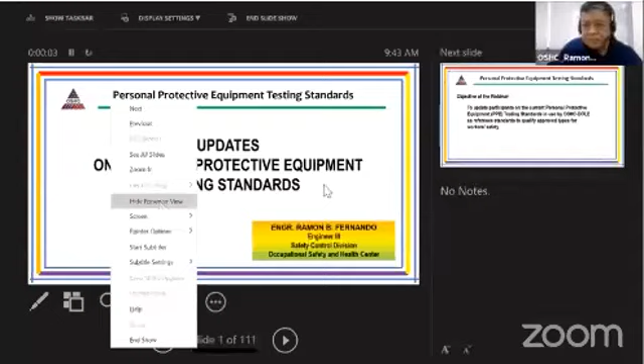Okay, can everybody hear me? So let's start with our webinar. My topic will be on updates on personal protective equipment testing standards. The objective is to update the participants on the current personal protective equipment testing standards in use by OSHC as reference standards to qualify approved types of PPE for worker safety.

You may be familiar with the prevailing laws that only approved types of PPE should be given to our workers for their safety in the work environment. But before we go to our topic, let us first examine what are the laws and regulations on workplace safety in relation to personal protective equipment.

As a reminder, the DOLE is the lead agency of the government in charge of the administration and enforcement of laws, policies, and programs on occupational safety and health. The legal basis is Presidential Decree number 442, or the Labor Code of the Philippines. When it comes to safety and health of our workers, including the use of personal protective equipment, our office, the DOLE, is in charge of the administration and enforcement of laws.

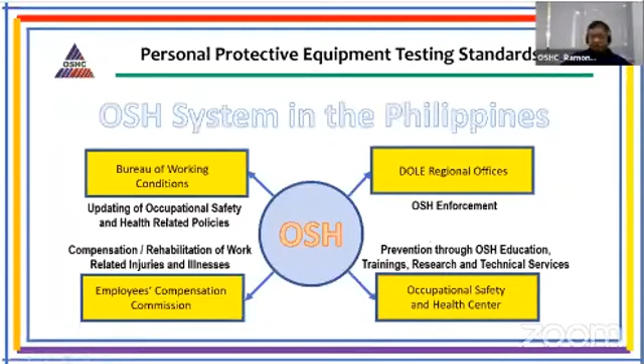So this is the agency that can give compensation or rehabilitation work. Now, for the prevention of injuries and illnesses in our work environment, through OSH education, trainings, research, and technical services, that's where our office comes in, the Occupational Safety and Health Center.

Just to give you a background, the Occupational Safety and Health Center was established through Executive Order number 307 by then President Corazon C. Aquino on November of 1987. And under Section 2, the center shall have one of its powers and functions: act as the duly recognized agency to undertake practical testing for safe use and set standard specifications of personal protective equipment and other safety devices.

So meaning to say, when it comes to personal protective equipment, our office, the Occupational Safety and Health Center, an attached agency of the DOLE, will be in charge when it comes to setting the standards for the use of our workers on the PPE that they will use.

Of course, the common reference of our agencies in DOLE when it comes to occupational safety and health will be our OSH standards, which is actually under amendment as of the moment. But by the definition given by Department Order number 198, it refers to a set of rules issued by DOLE which mandates the adoption and use of appropriate practices, means, methods, operations or processes, and working conditions reasonably necessary to ensure safe and healthful employment.

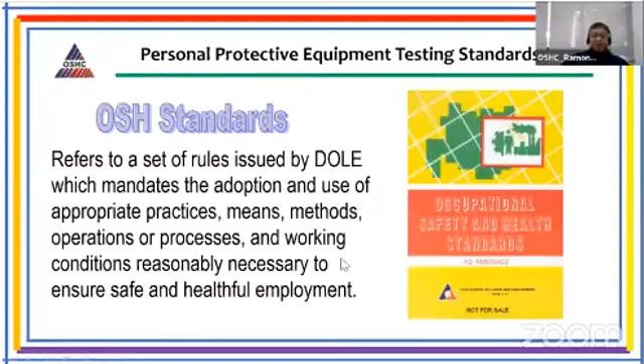So, under the OSH standards, Rule 1080, that's where we can see the requirements when it comes to personal protective equipment. Now, just recently, on August of 2018, to strengthen compliance with occupational safety and health standards and providing penalties for violations thereof, it was signed into law, the Republic Act 11058.

And for the declaration of policy, the state affirms labor as a primary social, economic force, that a safe and healthy workforce is an integral aspect of nation building. So as we can see here, Republic Act 11058 strengthens compliance to it. And there will be penalties, including for the use of substandard PPEs, if we are caught in the improper use of PPE in our workplaces.

Now, the implementing rules for Republic Act 11058 is the Department Order number 198, which was signed on December of 2018. Now, under Section 8, Chapter 3 of the Department Order Number 198, that's where we can see the workers' right to personal protective equipment.

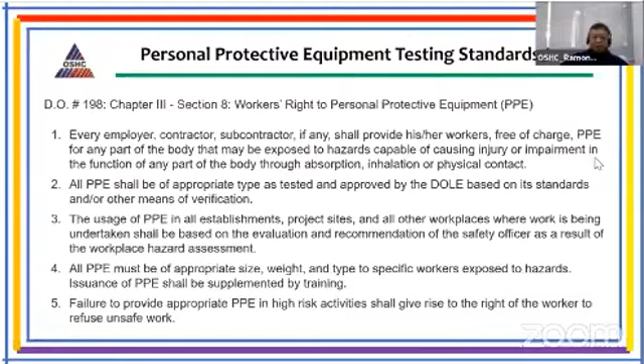So, there are 5 items. Maybe it's better to discuss them one by one. For item 1, every employer, contractor, subcontractor, if any, shall provide his/her workers free of charge PPE for any part of the body that may be exposed to hazards, capable of causing injury or impairment in the function of any part of the body through absorption, inhalation, or physical contact.

So it's very clear from this item that the employer should provide free of charge the PPE that each worker will need in order for him to be safe in the work that he does. And there is a PPE for every part of the body that may be exposed to hazards.

Now for item 2, it states that all PPE shall be of the appropriate type as tested and approved by the DOLE based on its standards and other means of verification. So here we can see that our requirement on appropriate type is strengthened. So when it comes to, let's say, a hard hat, maybe we provided a hard hat, but is it the appropriate type for the hazards that the workers are exposed to? Later on, we will examine what the appropriate types are.

And another thing, it should be tested and approved by the DOLE. So this is what we're looking at here. If for some reason we don't have testing on the types of PPE, the law says other means of verification. But again, if the DOLE or OSHC is capable of testing, then the approved type is the one tested here at OSHC DOLE. Okay, so that's what's in item 2.

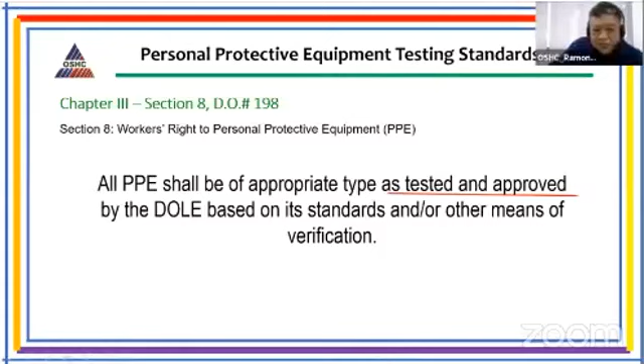Now, for item 3, who is responsible for the evaluation of the appropriate type? It states here that the usage of PPE in all establishments, project sites, and all other workplaces where work is being undertaken shall be based on the evaluation and recommendation of the safety officer as a result of the workplace hazard assessment. So continuously, the safety officer must conduct workplace hazard assessment, and based on the result of this assessment, he should recommend the appropriate PPE to be used by the workers who are being exposed to different hazards of the work area.

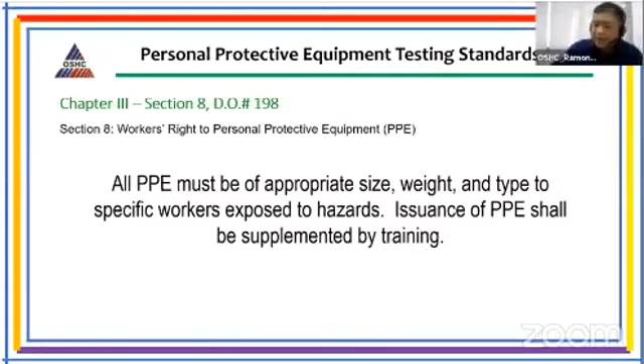Failure to provide appropriate PPE in high-risk activities shall give rise to the right of the worker to refuse unsafe work. Meaning to say, if the PPE provided is not appropriate for the work or for the exposure ng mga workers doon sa high-risk activities, then pwedeng sabihin natin ihinto muna yung trabaho until the appropriate types of PPEs are provided. So yan po yung mga karapatan ng ating mga workers when it comes to the use of personal protective equipment.

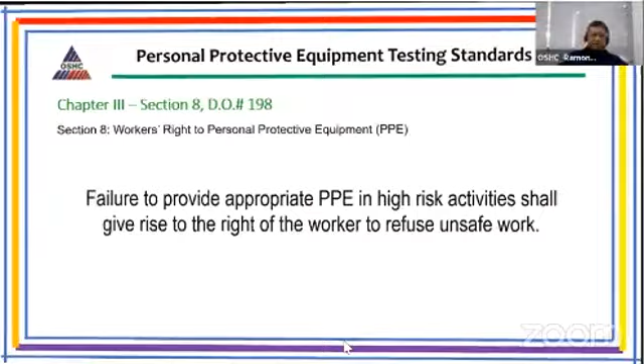Now, going back to our topic, let us first define personal protective equipment. Galing po ito sa DO 198. Personal protective equipment refers to specialized clothing or equipment designed to protect workers against safety and health hazards that may cause workplace injuries and illnesses. That is protection for the body, eyes, head, face, hands, feet, ears, etc. So for every part of the body that may be exposed to the hazards, meron po tayong mga clothing or devices that we use to serve as a barrier between the worker and the workplace hazards.

So by the use of PPE, it's only the last option sa hierarchy of controls, but still a very important option, kasi ang PPE, ang ina-avoid lang nito is the effect of the hazard doon sa worker. Well, the best option pa rin natin when it comes to the hierarchy of protection is actually to remove the hazard, to eliminate the hazard. And if we cannot do that, the next option will be to prevent the exposure of the worker to the hazard. And as a last resort, doon po pumapasok ang personal protective equipment in which we want to reduce the effect of the exposure of the worker to the hazard by wearing these personal barriers or devices para hindi siya maapektuhan ng ating mga hazards. So yan po yung ibig sabihin ng personal protective equipment.

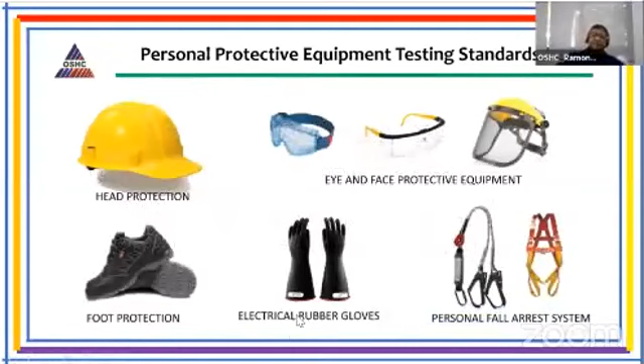So for today, I will be discussing testing standards in relation to these five parts of the body. We have the head protection, the hard hat, the eye and face protective equipment, nandyan po yung ating goggles, spectacles, and face shield. We have the foot protection, for the foot, electrical rubber gloves, and personal fall arrest system. So simulan na lang po natin siguro sa ulo, pababa tayo.

So for head protection, our present standard in use as reference is ANSI ISEA Z89.1 2014, or the American National Standard for Industrial Head Protection. So if we decipher yung title, ANSI means American National Standard Institute, ISEA is International Safety Equipment Association, Z89.1 is the code ng ANSI for the test method and minimum performance requirement for head protection. And 2014 is the version of Z89.1, which is actually the latest version for head protection in use or released by ANSI. Okay, so ano po ba itong Z89.1 na to?

This standard provides performance and testing requirements for industrial helmets commonly known as hard hats. It establishes the types and classes of protective helmets depending on the type of hazard encountered. It includes a specification for helmets designed to offer protection from lateral impact or top-only impact, giving employers and users the flexibility to specify the helmet that best meets the needs of their specific workplace. So ganyan po natin nakikita kung ano yung nilalaman nitong ANSI ISEA Z89 2014.

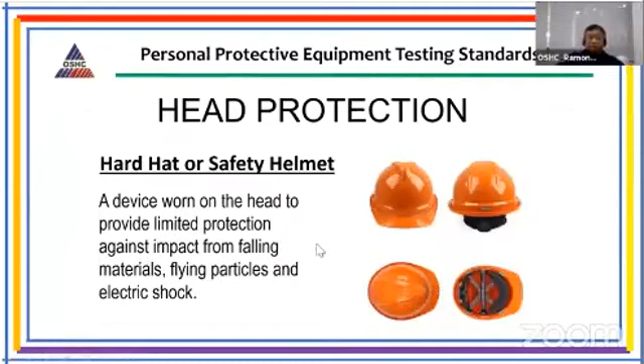So, what is a hard hat? A hard hat is a device worn on the head to provide limited protection against impact from falling materials, flying particles, and electric shock. So, meaning to say, anything that can injure our head, we rely on the hard hat to protect us doon sa mga hazards na yan. Okay, ano po ba yung mga hazards na talagang pwedeng magkaroon ng effect para sa ating mga ulo?

So here's the impact from falling objects. Like this worker walking here, suddenly there may be material that could fall on him. Of course, this will result in an injury, if not death. Bump against rigid stationary objects, penetration by sharp objects that could pierce our heads. Contact with live electrical conductors and fire hazards.

Now, what are the effects? For impact, bump, and penetration, it can be perforation or fracture of the skull. If you look closely at the X-ray of this person, we can see that the skull was really injured here. How about contact with live electrical conductors? It can be electric shock or even death, electrocution. And for fire hazards, it can be burns.

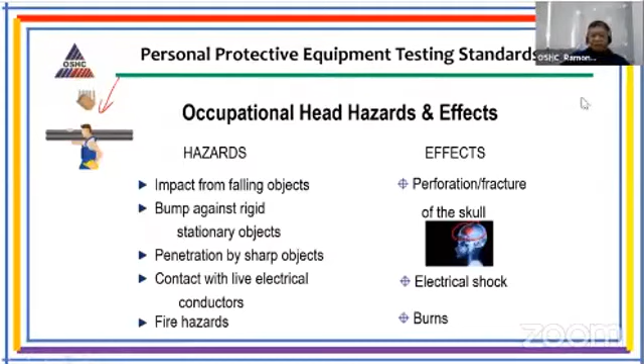So after identifying these hazards and understanding the effects, I'm very sure that we will need head protection. So let us examine what a hard hat is. First, there is the shell, the hard outermost surface of the helmet, excluding its harness, accessories, and fittings.

If we look at this, this colored yellow part is what we call the shell. And for this one I'm holding, it's colored white. This is what I use as my protection whenever I go to work areas. It depends—actually there's no regulation when it comes to the color, but it is management prerogative what color to use.

Let me give you an example. I used to work in a power plant, at Sucat Thermal Power Plant, for 17 years. Since the plant was big, the management wanted to easily identify the workers in the work area. That's why each department was given a different hard hat. Us in the office of the manager, we had white. Those in electrical, red. Let's say those in mechanical, they had yellow. General services, green. So it's a management prerogative when it comes to the color.

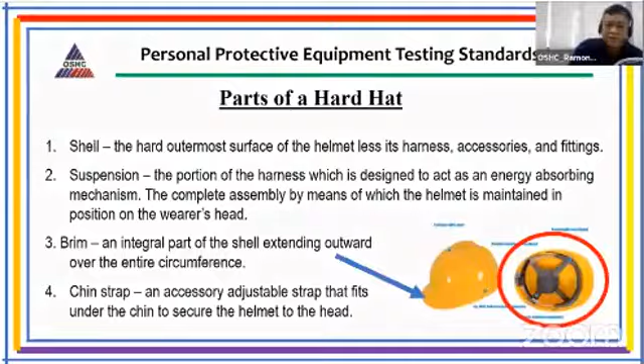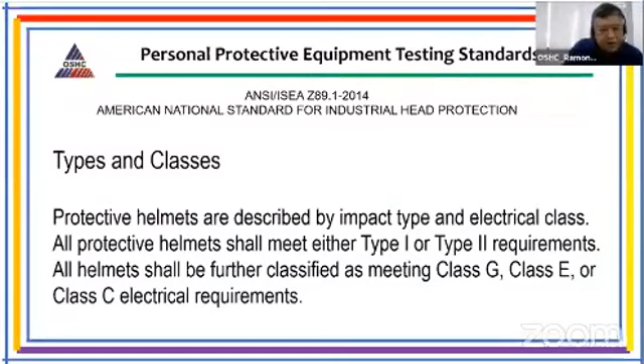Now, according to ANSI Z89.1 2014, protective helmets are described by impact types and electrical class. All protective helmets shall meet either type 1 or type 2 requirements for impact type, and all helmets shall be further classified as Class G, Class E, or Class C electrical requirements. Okay, let us qualify what is a type 1 and type 2.

Ang type 1 po, helmets are intended to reduce the force of impact resulting from a blow only to the top of the head. Kung may bumagsak na material or object doon sa top of the shell, siya po yung dapat na mag-absorb nung impact na yan. Yan po yung type 1 na tinatawag, only to the top of the head. In contrast to type 2, in which the helmet is tested doon sa top and also to the side.

Tinetesting po yan, but unfortunately, medyo mahirap po talaga maghanap ng type 2 dito sa Pilipinas. 95% sabihin na natin, or 98%, are only type 1. Why? Kasi nakikita ko rin naman na most of the hazards talaga ay actually sa taas ang nakikita natin. Why we wear a hard hat is because falling materials, siyempre galing yan sa taas. Kaya most of the time, yan po ang nakikita natin na availability doon sa ating market.

Now, bakit mandatory ang chin strap para sa type 2? Again, kung titignan po natin sa gilid ang protection nito, so most likely, baka matanggal o kaya bumagsak man yung tao, siyempre sa gilid din ito, siyempre dapat hindi matatanggal yung helmet.

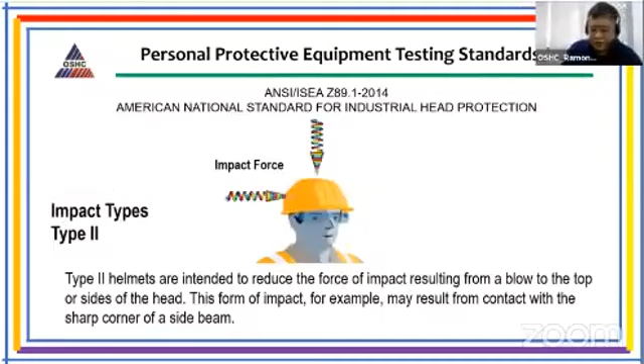Now, for the electrical types, both for type 1 and type 2, it must pass either a class E or class G. Otherwise, it will be classified as a class C. So what is class E or the electrical resistant helmet?

Class E helmets are intended to reduce the danger of contact with higher voltage conductors. Test samples shall pass the proof test voltage of 20,000 volts, and will burn through at 30,000 volts.

Class G, on the other hand, is a general utility hard hat intended to reduce the danger of contact with lower voltage conductors. Test samples shall pass the proof test voltage of 2,200 volts. But take note that this voltage is not an indication of the voltage at which the helmet protects the wearer.

So what does that mean? The 20,000 and 2,200 volts are just proof test voltages, not the rated voltage the helmet can actually withstand. What's important to know is that Class E has higher electrical resistance compared to Class G. Now what about Class C? These are the hard hats with no electrical protection.

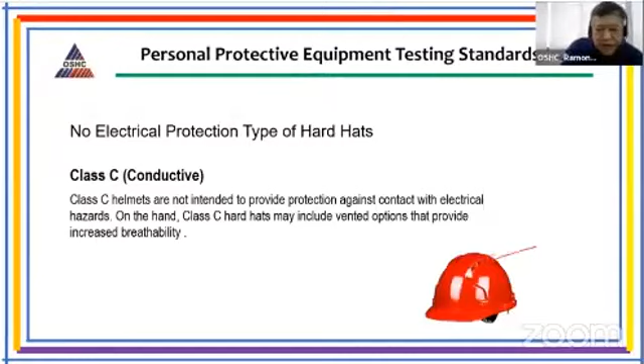So that's how we specify a hard hat, based on the impact type and electrical hazards that may be present in the work area.

Now, what tests do we need to qualify our safety helmets? ANSI Z89.1 requires four performance tests that must be met in order to assign a safety helmet type and class: force transmission test, apex penetration test, flammability test, and electrical insulation test.

So what is a force transmission test? It is a measure of the force transmitted to the test head form via an electronic load cell. A semi-spherical striking face impactor shall be dropped on top of the shell of the hard hat — later we'll drop this half-sphere striking face impactor onto the helmet.

Protective helmets shall not transmit a force to the test head form that exceeds 4,450 newtons, or 4.45 kilonewtons. Additionally, for each preconditioned specified helmet, the maximum transmitted force of individual test samples shall be averaged, and the average value shall not exceed 3.78 kilonewtons.

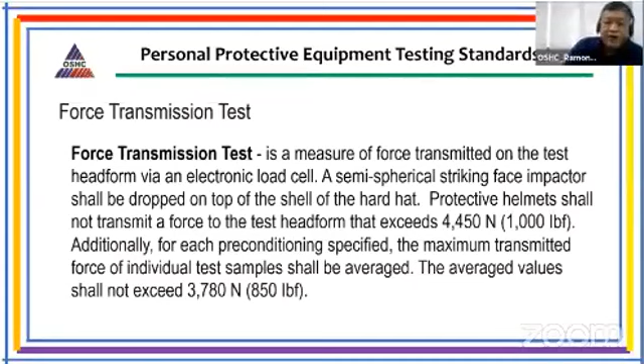So how do we actually do the testing? We use an oven as preconditioning equipment, preset at 49 degrees centigrade. All samples must be exposed to 49 degrees centigrade for at least 2 hours before we place them in the test apparatus. The purpose of this is to simulate the working condition in which the helmet will be used — 49 degrees is the test standard for hot conditions.

Now, this is our force transmission equipment. This is what we call the semi-spherical impactor, weighing about 3.6 kilograms, and it will be dropped onto the setup. Once our helmet is set up here, we drop our impactor onto it.

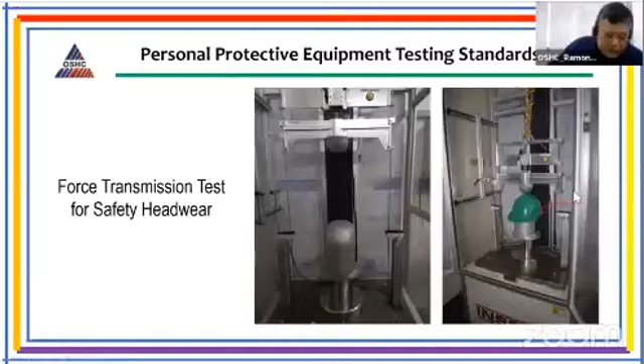Let's see what happens when it is dropped — this is just a short video so we can see how the testing is done. Automatically, the equipment will be raised. If you're interested in the height, it's about 1.5 meters. After it's dropped, the output from our load cell is sent to the recorder, and the recorder transmits it to the computer where we can see the test results.

The required velocity is about 5.5 meters per second, and the maximum force transmitted is 2.69 kilonewtons.

Kung titignan natin dito, ito yung maximum force na tinitignan at ina-average natin. So no force should exceed 4.45 kilonewton, and for the average of the three, it should not exceed 3.78 kilonewton. So ganyan natin nakikita how a force transmission test is conducted.

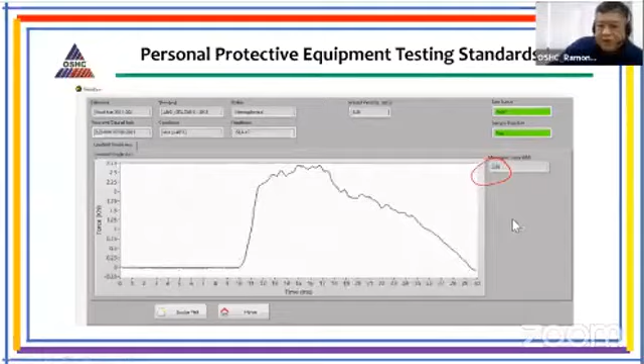Now, the second requirement to qualify for impact type is the apex penetration test. It measures the top of the hard hat's capability to resist penetration. Siyempre, baka mamaya kaya nga niya mag-absorb ng force. Pero pagka matulis na bagay ang bumagsak, nabibiyak, siyempre hindi naman siya pwede rin na maging head protection.

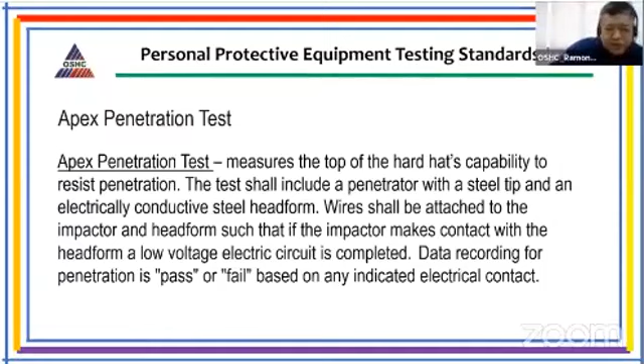The test shall include a penetrator with a steel tip and an electrically conductive steel head form. Wires shall be attached to the impactor and head form such that if the impactor makes contact with the head form, a low voltage electric circuit is completed. Data recording for penetration is pass or fail based on any indicated electrical contact.

So if we examine the test apparatus, actually we are using the same apparatus but with a different impactor. Iba itong impactor na ito, it is lighter, pero matulis naman siya compared doon sa semi-spherical. Now, if you look at this impactor, meron pong wire, connecting wire. At the same time, dito sa ating head form, meron din po yung wire. So, the moment na bumagsak yan at nagkaroon ng electrical contact, magre-register po yan doon sa aming computer.

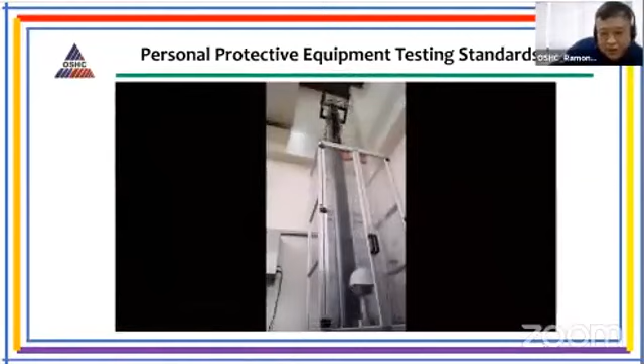Tingnan po natin what will happen in the actual testing of a hard hat. So, this is our test apparatus. Pag tinignan natin yan, the impactor will be raised up to the top of the pole, hanggang doon, about 2.5 meters yan. And then, from that position, it will be dropped doon sa head form, doon sa helmet, to see if there is electrical contact. Now, after that, ito yung ating makikitang result.

Makikita natin the impact velocity is about 7 meters per second, which is the requirement. And then, kung nagkaroon siya ng contact, magre-register dito kung may contact siya at ano yung time na nagkaroon siya ng contact. So ganyan po natin nakikita yung testing na ginagawa pagka apex penetration ang ating tinetest.

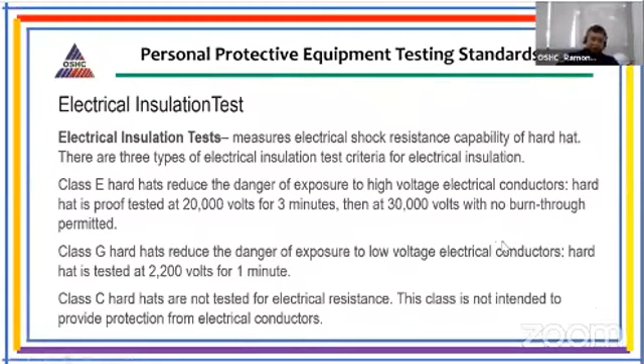How about electrical insulation test? It measures the shock resistance capability of the hard hat. And as was discussed earlier, it can be 20,000 volts for Class E, 2,200 volts for Class G, and actually Class C is not tested for electrical resistance. So this is our equipment for testing the electrical resistance capability of the shell.

Kung makikita natin, withstand voltage tester. Itataas natin yung voltage up to 20,000 volts for Class E, sa nababasa nyo ba 20,000 volts? Ako nababasa ko 20,000 volts. Tapos ito yung ating probe. The probe is actually connected by electrical wiring hanggang doon sa test probe na nasa loob ng hard hat.

The hard hat is actually inverted and filled with water up to the static test line. And then the water outside is also up to the test line. And then 20,000 volts for 3 minutes, titignan natin kung ano yung leakage current. Now, for Class E, the leakage current shall not exceed 9 milliamperes for 3 minutes. And for Class G, which is the proof test voltage of 2,200 volts, the leakage current should not exceed 3 milliampere.

Again, for Class E, the leakage current should not exceed 9 milliamperes. And for Class G, it should not exceed 3 milliamperes. So ganyan po natin nakikita yung testing for the electrical resistance capability of the shell.

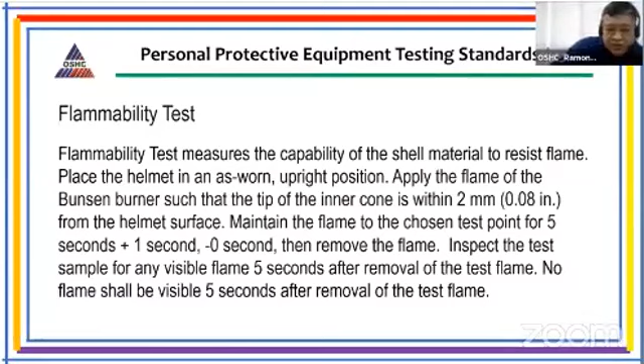And the last test that is required by the standard is the flammability test. Flammability test measures the capability of the shell material to resist flame. Titignan natin kung yan ay masusunog. So to qualify na siya ay makapasa, actually from the Bunsen burner na meron tayo, i-expose natin siya sa blue flame ng ating Bunsen burner at about 2 mm from the surface ng ating helmet for 5 seconds.

And then remove the flame and then examine if there will be a flame after 5 seconds. Kung meron siyang flame after 5 seconds, yan po yung babagsak. Kung wala, pasado na sa flammability test yung ating hard hat. So ganyan po natin nakikita yung ating flammability test for the hard hat.

Now, for the eye and face protection, lipat naman tayo sa eye and face protection. Our testing standard is ANSI ISEA Z87.1 2015, or the American National Standard Occupational and Educational Personal Eye and Face Protective Devices. So for this standard, usually what we're testing are safety goggles, safety spectacles, and face shields.

So what is the purpose of this ANSI Z87.1 2015? This standard provides minimum requirements for protectors, including selection, use, and maintenance of these protectors as devices to minimize or prevent eye and face injuries. As always, from the very start, we say that PPE aims to minimize the effect of the hazard on the person.

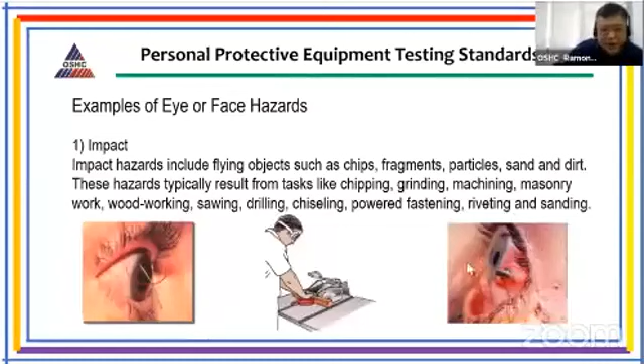Let us look at some hazards that each worker may encounter when it comes to the eye. How about impact hazards? These include flying objects such as chips, fragments, particles, sand, and dirt, typically resulting from tasks like chipping, grinding, machining, masonry, woodworking, sawing, drilling, etc. It's hard when something pierces your eye, like this. That's what can pierce our eyes. It's really dangerous, so as much as possible, we avoid these impact hazards.

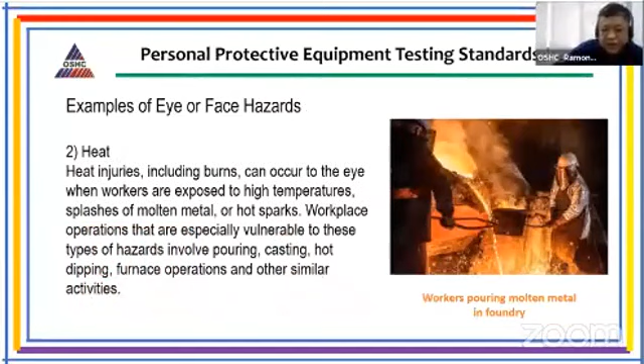How about heat? Heat is another factor that may injure the eyes. This includes work involving molten metal or hot sparks, so that's why it's important that we also have eye and face protection.

How about chemicals? Direct contact with chemicals is another leading cause of eye injuries. A lot of injuries, which typically occur in the form of splash, mist, vapors, or fumes, result from inappropriate choice of PPE. So we see that even when PPE is used, if it's the wrong choice, our eyes can still be affected.

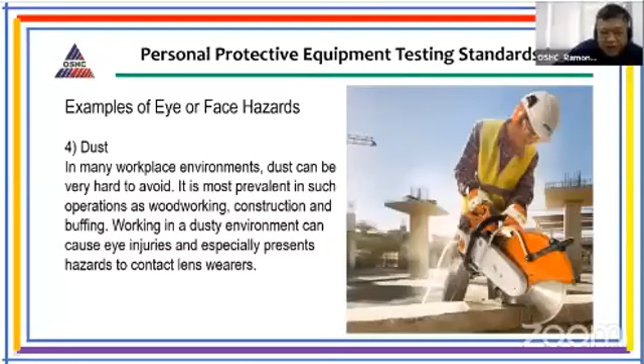How about dust? This is most common in construction project sites, where there can be a lot of effects on the eyes because of the small particles that stay suspended in the air for a long time, making it easy for our eyes to be affected.

And the last is optical radiation, usually brought about by welding. This is the welder's flash. I myself was once a victim of welder's flash. Even though I was quite far while observing someone welding, I was still affected by the welding radiation. So that's how we see the hazards for our eyes.

Now let me discuss with you some of the protectors that we test here at the center. Safety spectacles are primary protective devices with side protection and impact-resistant lenses intended to shield the wearer's eyes from flying and striking objects, glare, and injurious radiation hazards.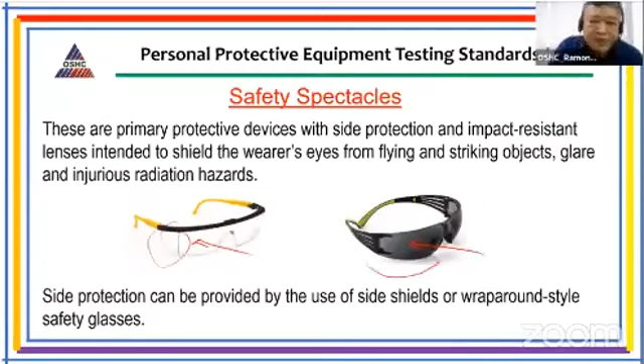How about goggles? For hazards that may easily enter the eye area, even if not directly perpendicular to the eye upon impact, like our liquid or gaseous hazards, that's when we use goggles. Goggles are primary protective devices with a tight-fitting frame and high impact-resistant lenses that completely cover the eyes, eye sockets, and facial area surrounding the eyes.

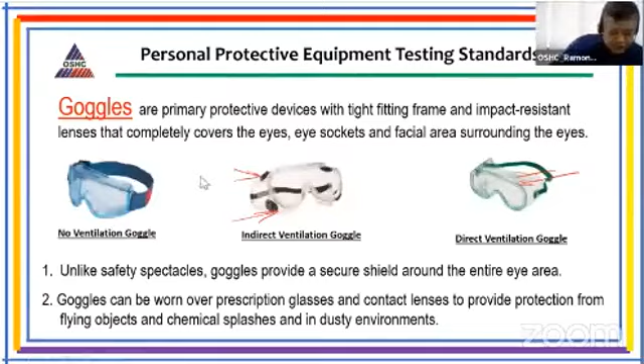Now, what is a face shield? A protective device made of impact-resistant shield. If you look at all our eye and face protection, all of them are impact-resistant. It should extend from the eyebrows below the chin and across the width of the employee's head.

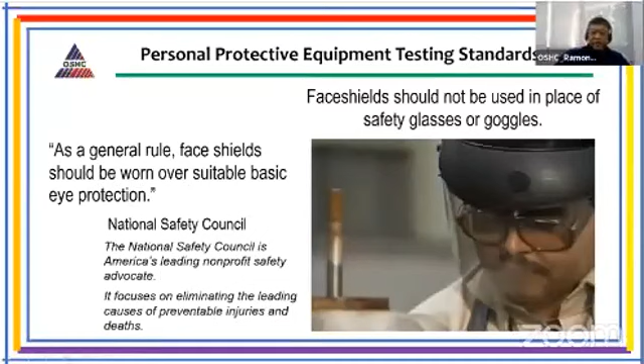Now, what are the performance tests that we need to do for our eye and face protective equipment? According to ANSI Z87.1, 2015, there are a lot of tests actually required by the standards. But unfortunately, as of the moment, these are the only tests that we can conduct for the eye and face protective devices: the high mass impact test, the optical test requirements such as the refractive power test, astigmatism test, resolving power test, and the prismatic power test.

Also the ignition test for the lenses, and the corrosion resistance test for the metal components if there is any. So that's how we see the tests that we actually perform at the center. But again, this is not the entirety of tests required by ANSI Z87.1, but these are, we believe, the important ones that our eye and face protective equipment need to pass.

So, high mass impact test. This test is intended to determine the capability of a protector to resist impact from relatively heavy pointed objects traveling at low velocity. So when there is material that can directly impact our eyes, we should have protection, which is our spectacles that passed the high mass impact test.

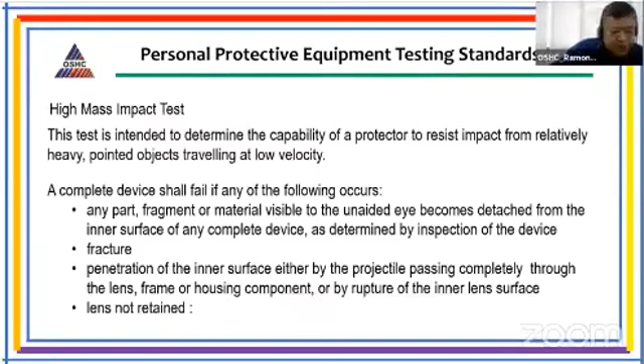How about fracture? If we see after impact that there was a fracture, that's also a failure. Penetration of the inner surface by the projectile, passing completely through the lens, frame, or housing component, or by rupture of the inner lens surface. And then the lens not retained - in case it has a frame, if it gets detached from the frame, that's still a failure. Okay?

So this is our high mass impact test apparatus. We can see it has a guide tube here, and then we have a test head form where we place our test specimen or sample. And this is the projectile that we will drop here into the guide tube. It should hit relatively near the eye area where our impactor lands.

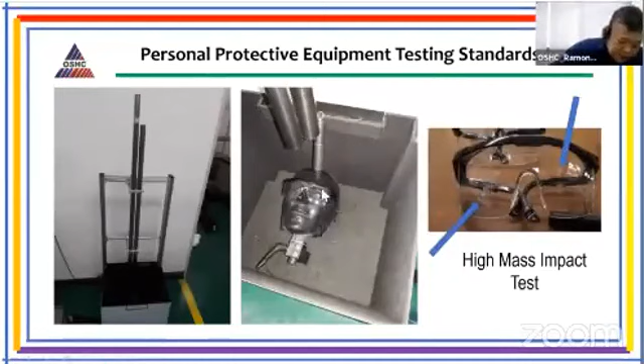Based on the 4 criteria that I mentioned, those are the qualifying requirements to determine if it passes or not. In case you're interested, the weight of this projectile is about 500 grams or half a kilo, which will be dropped onto our test specimen.

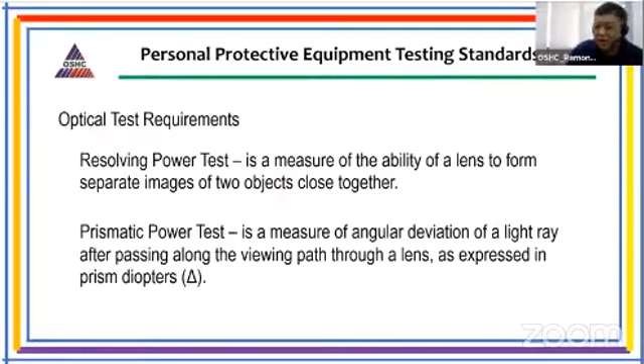Now this is the equipment that we use for refractive power, astigmatism, and resolution test. This is the refracting power test apparatus as we call it. If we look at this portion, this is a telescope, and this is the adjusting knob for the telescope, which we look through in order to qualify the lens in front if it passes.

Now this far part here, this is the target image plane that we look at through the lens. If you look at it, it is actually a combined resolving power lines and sunburst lines. This is how we see this target image plane.

Now the distance between the objective lens and the target image plane is actually 35 feet. That's how far it is, so it appears small to us. Now, if all the sunburst lines are visible after adjusting the knob, that is actually the refractive power of the lens, and that's how we measure it.

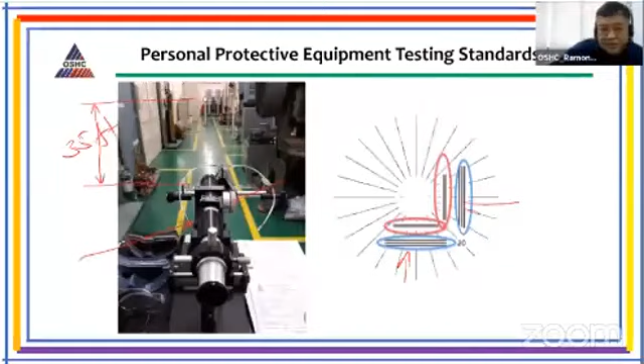Now what about the prism test? The prism test is actually to determine the angular deviation of the light ray after passing through the test apparatus. This is similar to what a person would see if the light changes through their lens. Now to pass, it should not exceed...

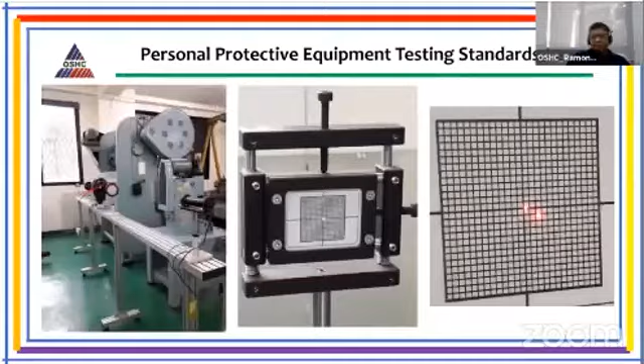Now, ignition test is to determine the protector's resistance to ignition as worn. Definitely, if we're not careful and get too close to a source of heat, we could get injured if it doesn't pass the ignition test. Anyway, so this is the hot rod that we check. Now, this hot rod should be maintained at about 650 degrees centigrade.

650 degrees, and then we bring the lens close to it for 5 seconds, then remove from the hot rod, and examine if there's any burning or fire remaining. If there's none, it passes. Of course there will be marks, but that's okay as long as it didn't continue. There should be no glow or any evidence of fire on the lens.

That's how we do the ignition test for the safety eyewear. And the last part, if ever there is a metal component of the eye protector, we do the corrosion test.

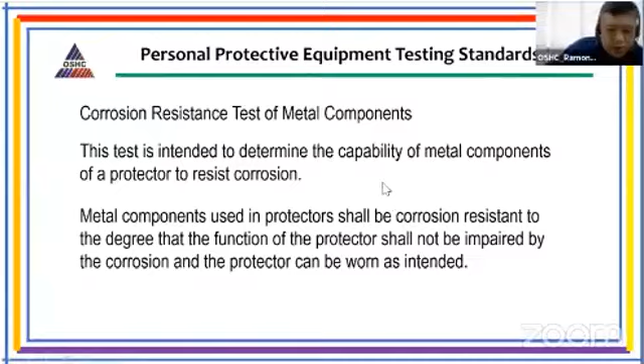Now for the corrosion test, we first boil water, saline solution. And then, removing from the heat, we expose the metal components for about 15 minutes. Then immediately we re-rinse it in warm tap water, saline solution as well. And then we leave it for 24 hours without wiping off the adhering water droplets.

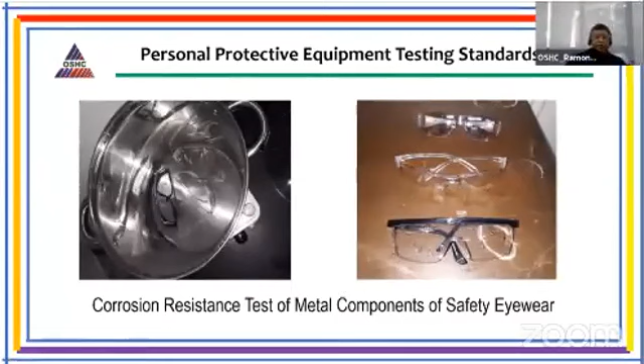Now, for fall protection, what we use is a personal fall arrest system. And our test standard is ANSI ASSE Z359.1 2007, or the safety requirements for personal fall arrest systems, subsystems, and components. Okay, what's the purpose of this Z359.1?

This standard addresses only personal fall arrest systems incorporating a full body harness and establishes the minimum performance requirements. So we want to know what is the minimum performance of the components of this personal fall arrest system.

This standard addresses the equipment used in occupations requiring personal protection against falls from heights and applies to manufacturers, distributors, purchasers, and users of such equipment.

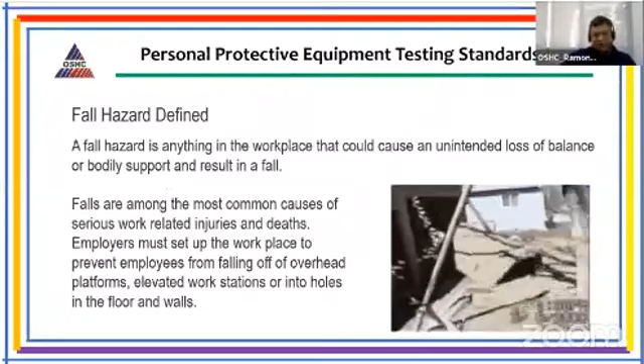So what is a fall hazard? A fall hazard is anything in the workplace that could cause unintended loss of balance or bodily support and result in a fall. So any location in the workplace in which a worker can be exposed to a fall is a fall hazard. So anything that could cause a person to drop from a higher elevation to a lower elevation is a fall hazard.

So elevated locations which require increased fall hazard awareness would include scaffolds, ladders, roofs, open sides and edges, excavation edges, floor openings, and formworks.

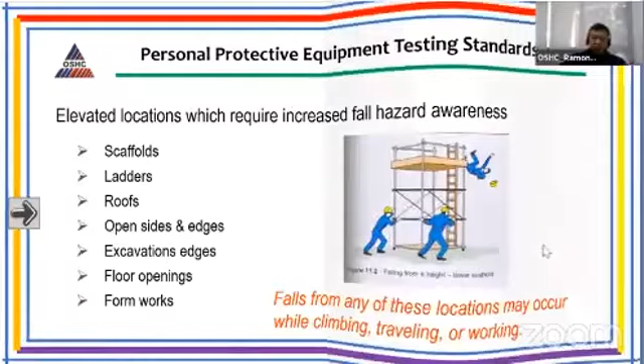So what can be done to reduce the falls? This is one requirement of OSHA. OSHA requires that fall protection be provided at elevations of 4 feet in general industry and 6 feet in the construction industry.

So kung titignan po natin, sa OSHA, meron difference doon sa pagdating sa requirement kung kailan ka gagamit ng fall protection. Sa general industry, it's 4 feet, whereas sa construction industry, it is 6 feet. So, in any case, our standard, ito po sarili nating standard, the OSHS, require us to provide fall protection for workers exposed to fall hazards.

And this can be guarded - guard every floor hole into which a worker can accidentally walk using a railing and toe-board or a floor hole cover. So, sa standard po natin, nire-require na dapat, kung may floor opening in which a person can pass through, dapat meron siyang floor cover or a guard railing.

Now, guard railing should also be provided at elevated open-sided platform, floor, or runway. So, any edges doon sa elevated work area, dapat po meron tayong guardrail, standard guardrail. At least 1 meter yung ating height. And meron po siyang top rail, mid rail, at meron toe board. Okay? So, ganyan po yung requirement natin for the guardrail.

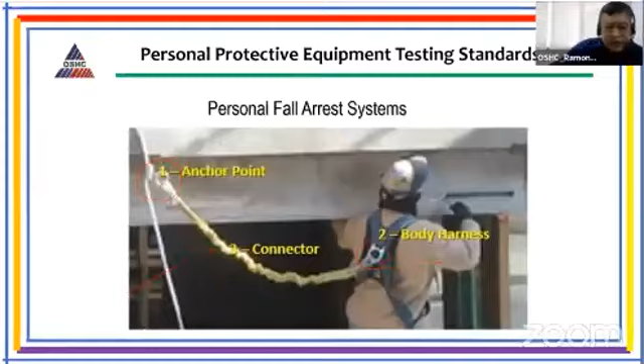Now, under Rule 1086.02 of our standard, ang anchor po is a secure point of attachment capable of withstanding the anticipated forces applied during a fall. Okay? It shall be located above the worker. Now, as a requirement, as of the moment, the requirement po is about 5,000 pounds na dapat yung capacity ng ating anchor, and it should be tested doon sa anticipated direction kung saan mangyayari yung fall of a worker. Dapat ganun natin tinetest yung ating anchor.

What is a connecting lanyard? It is a flexible line of webbing or synthetic rope used to secure a body belt or full body harness to a lifeline or anchor. Okay? So ito pong ating connecting lifeline. Usually, nakakabit ito dun sa full body harness. It can be directly connected to an anchor or a horizontal lifeline or a vertical lifeline.

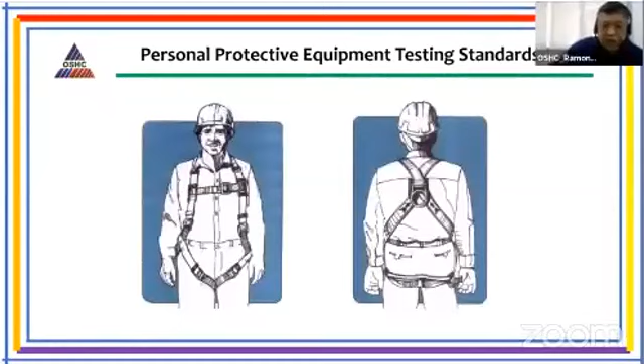Okay, pag sinuot po natin yung ating full body harness, more or less ganito po yung magiging itsura niya. Two straps around dito sa ating legs, nakalagay siya, doon across the chest, at sa likod po natin, nandyan yung D-ring. So ano po ang purpose niyan? To distribute yung weight nung tao na nagsusuot nito in case there is a fall. So kung titignan po natin, when you fall using a full body harness, lahat po ng strap connected doon sa ating katawan, magdadala ng weight natin.

Whereas compared to a body belt na nakapokus lang doon mismo sa portion kung saan natin kinabit yung body belt, usually dito sa merong area ng likod natin. But the problem is, with a force, yung weight natin na bumagsak dyan, most likely there is an injury that can happen dito sa likod natin or doon sa mga internal organs natin na tatamaan. Kaya nga po, mas safer kung tayo ay gumagamit ng full body harness kaysa body belt.

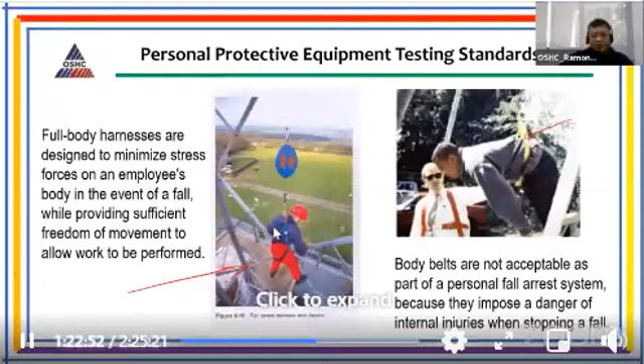Ano yung effect sa body when you are wearing a full body harness or a safety belt. Sa full body harness, distributed yung weight ng isang tao na nahulog, compared to a body belt na actually nakapokus sa isang portion ng katawan natin. Kaya delikado, kaya hindi na siya ginagamit as a fall arrest system component.

Ito po yung testing na ginagawa namin. Tinatanggal namin each of the components na gusto nating i-test mula sa specimen - webbing harness, webbing lanyard, o rope lanyard. Ang qualifying dyan, this load-bearing strap material shall develop a breaking strength of not less than 22.2 kilonewton.

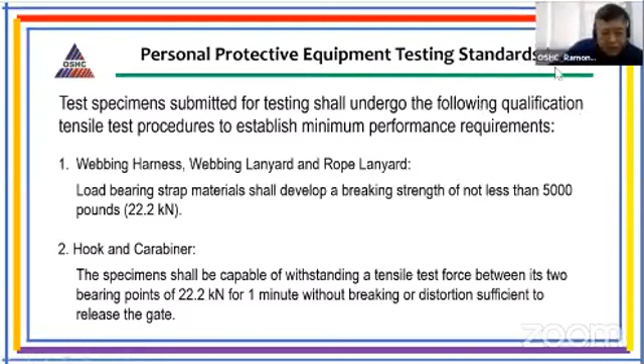Ngayon para sa hook at carabiner, pareho din po siya. The specimen shall be capable of withstanding a tensile test force between its two bearing points of 22.2 kilonewton for 1 minute without breaking or distortion sufficient to release the gate. So ganyan po natin nakikita yung testing.

Ngayon, para sa D-rings, O-rings, at oval connectors, 22.2 kilonewton din po. At para sa buckles, 17.8 kilonewton.

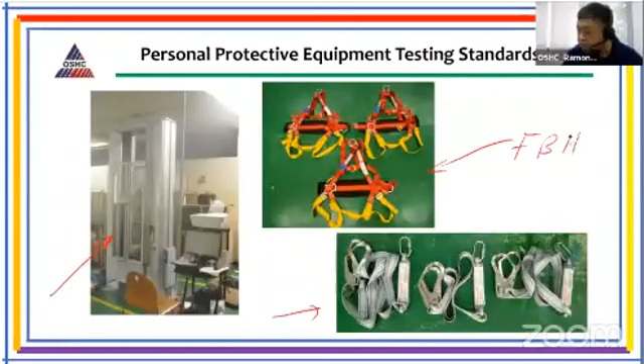Ito po yung aming universal testing machine, ito pong nakikita natin na equipment, ito yung test apparatus namin para sa universal testing machine. At ito po yung test specimen para sa full body harness - ito po yung full body harness. At ito naman po yung ating lanyards.

Paano po natin yan gagawin? Isa-isa po yan, ilalagay natin doon sa equipment with the corresponding jigs, kung ano man yung jigs na kailangan. Kung titignan mo, magkakaiba yung jigs nito, dahil each of the component would require para maging tama yung ating pull. So yan po yung testing na ginagawa natin for each of the component.

At dapat po, after testing, makikita natin kung siya ay papasa. So this is the test result na nakukuha natin from the equipment. Based on the test result, kung mapapatid siya o makikita natin na hindi niya kinaya yung 22.2 kilonewton, ibabagsak natin pag hindi siya nakayanan.

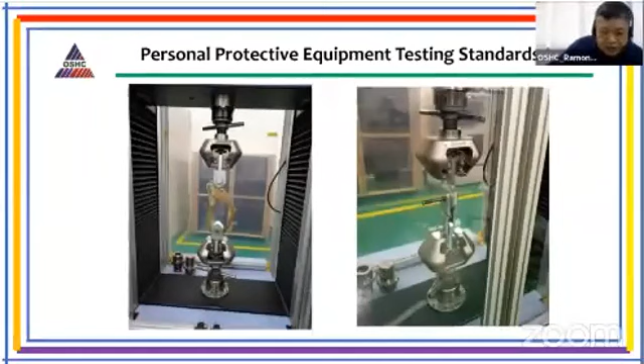Ngayon, this is the test naman para sa ating scaffolding hook. At sa right side, ito naman po yung para sa buckle. Yan din po yung test result na makikita natin. By the way, pagka tayo po ay nagte-testing ng ating mga equipment, let's say para sa buckle, para sa scaffolding hook - mukha po nito, sa scaffolding hook.

Dapat po, pagka tinitignan po natin, dapat may 2 consecutive intentional actions. Pagka pinindot ko po ito, basta-basta hindi yan basta mabubukas. Dapat pindutin ko muna ito sa side na to, saka lang siya bubukas. So 2 consecutive intentional actions before na ma-release natin. Yan po yung requirement ng ating standard, para sa hooks at also para sa carabiners. Ganyan po natin siya nakikita.

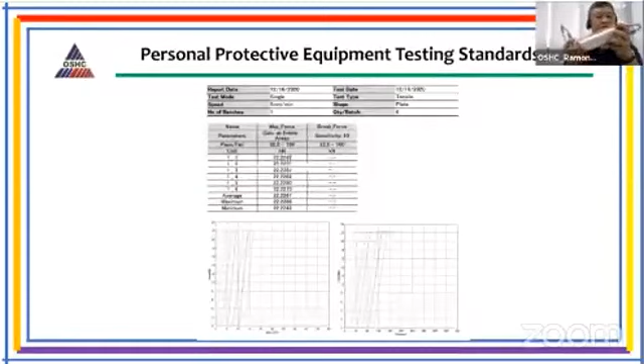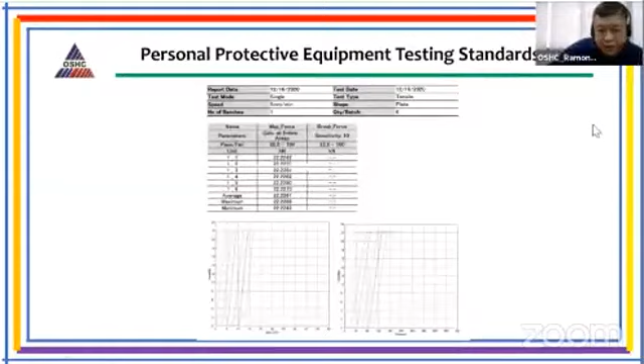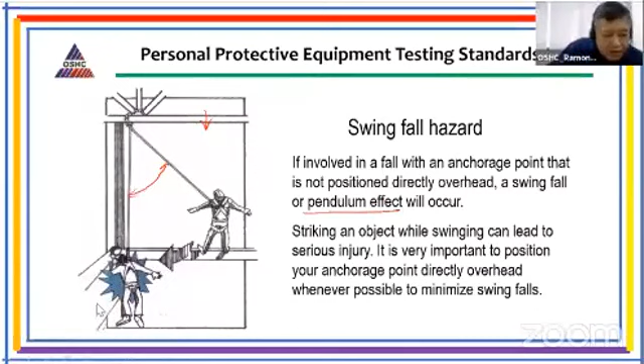Another thing na kailangan nating obserbahan, o gusto nating i-avoid, is the swing hazard. Ito po yung swing hazard, itong angle na to. Dapat po, kaya nga sinasabi sa atin, the anchor must be above the worker, at least dapat nandito siya. This will prevent yung pendulum effect, yung pendulum effect na pwedeng yung tao na nakasuot niyan ay pwedeng humampas doon sa ating pinakamalapit na object. So ganyan po natin nakikita yung mga dapat nating avoid when using fall arrest system.

Reminder: after a fall, immediately remove from service all equipment used to arrest the fall. You cannot use the equipment again until it's been inspected and approved by the manufacturer, safety consultants, or a professional engineer. So if there's been any difference after a fall, the complete fall arrest system composed of the full body harness and the lanyards used should be removed from service until inspected by the manufacturer or any professional engineer.

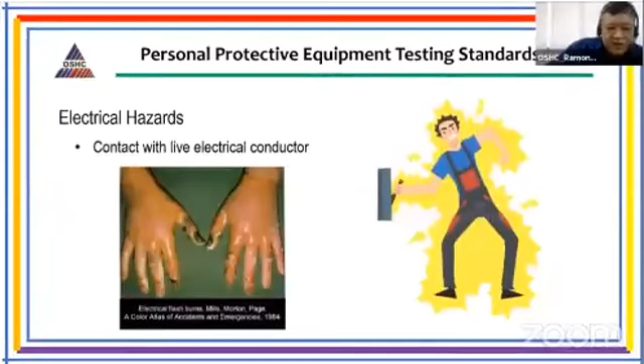Now, the fourth type of testing that we conduct is for electrical rubber gloves. Not all kinds of gloves are tested at the center at the moment, but we only test electrical rubber gloves. Our standard is PNS ASTM D120-2016, the standard specification for rubber insulating gloves. Our hazard here is electrical hazard, specifically contact with live electrical conductor. So this standard for electrical rubber gloves is a Philippine National Standard.

This is a Philippine National Standard adopted by the BPS, our Bureau of Philippine Standards. The original document is ASTM D120 version of 2014. Now, according to the standard, gloves are used for personal protection. Therefore, when authorizing their use, a margin of safety shall be allowed between the maximum voltage on which they are used and the proof test voltage at which they are tested.

So here's how it works: according to ASTM or PNS ASTM D120-2016, electrical rubber gloves are classified under 6 classifications - Class 00, 0, 1, 2, 3, and 4. Now, Class 4 are proof tested to 40,000 volts and has a maximum use voltage of 36,000 volts. Compared to Class 0, which is proof tested to 5,000 volts with a maximum use voltage of only 1,000 volts.

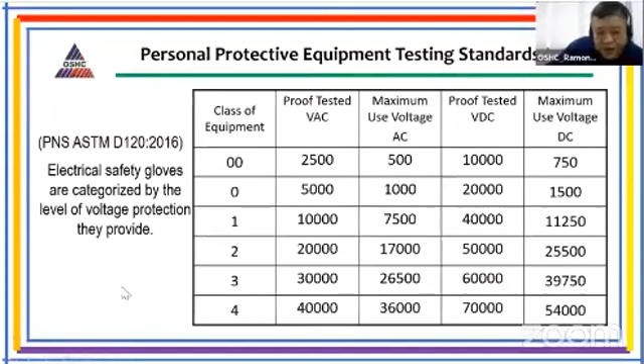So just like the hard hat, this is how we test using the withstand voltage tester through the connecting lines. There's our water line, the test line. And then the conductor. We measure the leakage currents according to the requirement of PNS ASTM D120. That's how we see our standard in action.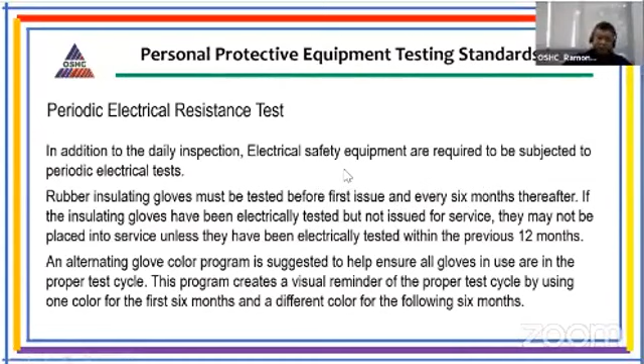Now, for the last part of our discussion, we will discuss foot protection. Under foot protection, we have two standards: PNS ASTM F2412-2016 for the standard test method, and PNS ASTM F2413-2016 for the standard specification for performance requirements for protective toe cap footwear.

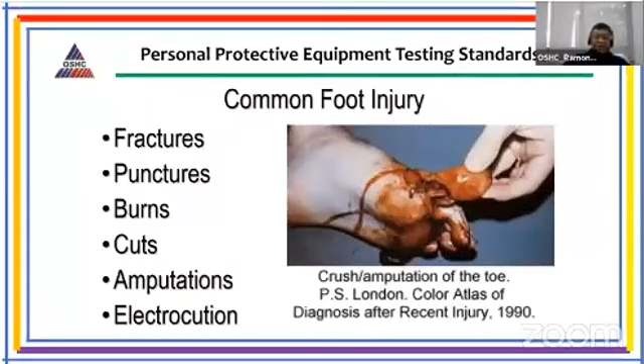So what are the foot hazards? Falling or rolling objects - of course, if something falls on us and we're not wearing safety shoes, most likely we'll get injured. How about sharp objects, especially at construction project sites - there might be nails that can puncture our shoes. Live electrical conductors, in case we step on one. Hot surfaces, and even wet, slippery surfaces. Now, common foot injuries will be punctures, burns, cuts, amputations, and electrocution. Often what can happen is a crush to the toe cap, or toe, I mean.

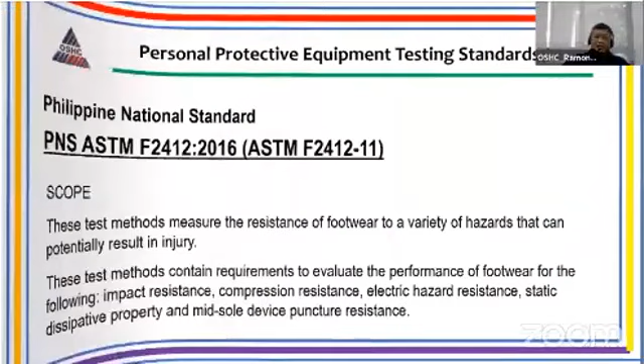Kaya po meron tayo sa safety shoes natin na toe cap na tinetest natin. Now, for ating standard, the Philippine National Standard, which is F2412-2016, these test methods measure the resistance of footwear to a variety of hazards that can potentially result in an injury.

Whereas yung 2413, ito po nagbibigay ng minimum requirements for the performance of the footwear. Okay? So ano po yung mga tinetest natin sa mga footwear?

We have the impact resistance for the toe area of the footwear, requires a minimum clearance of 12.7 mm for men and 11.9 mm for women after a nominal impact of 75 foot-pounds. Compression resistance for the toe area of footwear requires a minimum clearance of 12.7 millimeter for men and 11.9 millimeter for women after compression of 2,500 pounds.

Puncture resistance properties of the midsole, or puncture resistant device, dapat po can withstand 270 pound force.

So ito po yung testing. Initially, pinuputol po namin o kinakat namin yung sapatos to fit into the test apparatus natin. And initially, gumagawa po tayo ng ating modeling clay para siya ang maging determinant kung ano yung naging depression ng sapatos after impact or compression. So when we place it in the test machine, we make sure that the naka-align po yung ating tip ng ating impactor doon sa toe cap at saka doon sa modeling clay.

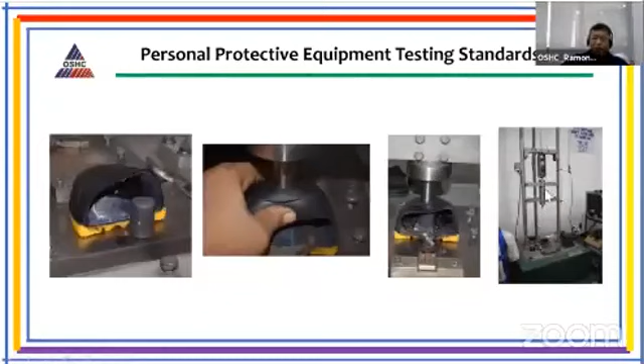So ganyan po yung magiging itsura. At yan na yung itataas natin yung ating impactor to a height that would give 75 foot-pounds. Okay? So ganito po yung ating testing.

Titignan po natin, mabilis lang to. Pagbagsak po niyan, makikita na natin kung ano yung force o yung naging depression ng ating clay after impact.

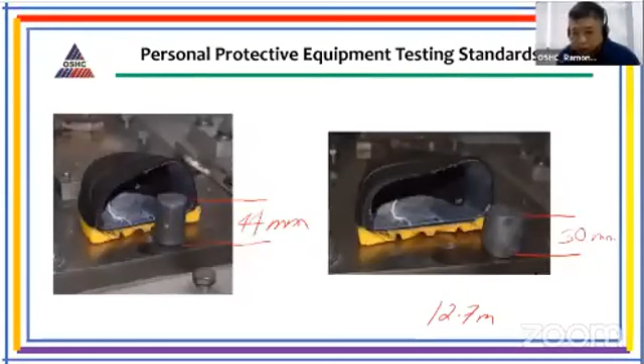So ito po yung ginawa kong sample for testing. Initially, I measured itong height nitong ating clay and ito po ay 44 millimeter. Now, after impact na ginawa natin doon sa nakita natin sa video, this clay ay naging 30 millimeter. Pagka binagsakan, ang ating po requirement ay 12.7 millimeter. So definitely, pasado po ito, kasi malayo. Kasi ganyan po yung kanyang clearance doon sa toe cap.

Now, ano naman yung compression? Ang ginagamit po namin dito is a universal testing machine also, for compression. Okay? So initially, ito po yung atin, ikakat natin yung sapatos at meron tayong clay na ilalagay dun sa loob. At ganyan po yung kanyang magiging itsura.

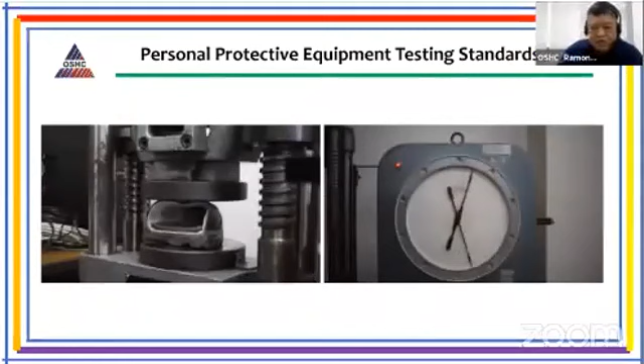Now, observe what happens when we operate the compression machine. So as the compression of the toe cap, ginagawa po natin na ibabasa po natin. So this is the set point. Ito po yung set point natin. So hanggang dyan dapat makikita natin, yan po yung 2,500 pounds. At makikita natin kung yan ay yung clay ay makakapasa doon sa limit na ni-require para sa kanya.

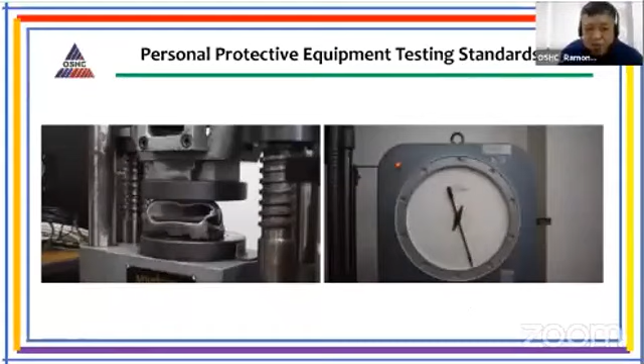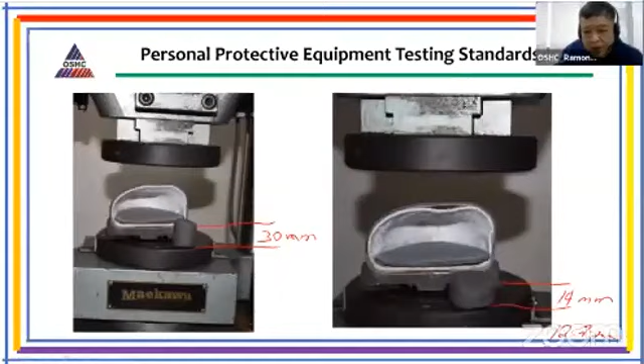So after 2,500 pounds, ihinto na po natin yung testing. And then we will look at the clay, kung ano yung depression niya. Now, when I conducted this test, initially po itong clay na to ay 30 millimeter. And after testing, ito pong clay na to, bumaba po siya sa 14 millimeter. Again, this is a male sample, kaya ang ating pinagbabasihan dyan ay 12.7 millimeter. Ganyan po natin ginagawa yung ating testing. Of course, pasado pa rin yan, kahit 14 millimeter, kasi hindi naman niya bumaba doon sa 12.7 millimeter.

Now, for the electrical property of safety shoes, the same equipment, pero siyempre dry condition to, walang tubig ito. And then we expose it to 18,000 volts for 1 minute. And then we observe the leakage current. It should not be more than 1 milliampere for 1 minute.

And for static dissipative, ito po as component ng ating equipment, we have the power source that would give us 50 volts DC. At the same time, this one is the voltmeter, with a resistor across, which is actually 1 mega ohm. And then we measure kung ano yung voltage na ilalabas pagkahawak ng tao yung wire na nagkokonekta doon sa ating equipment to the grounded plate, steel plate. Okay? So ganyan po natin nakikita yan.

Now the limit sa resistance is between 1 mega ohm to 100 mega ohm. Dapat within that para makapasa siya sa static dissipative test.

Okay, so I'm about to end my discussion for the clear points.

PPE requirement of workers in workplaces is the responsibility of employers and contractors. Appropriate types of PPE for use shall be based on the hazard assessments of the safety officers. Only PPE tested and approved by the OSHC DOLE, such as safety shoes, hard hats, safety spectacles, safety goggles, impact-resistant face shields, electrical rubber gloves, and components of personal fall arrest systems, shall be provided to the workers free of charge.

As a summary: assess the workplace for hazards, use engineering and work practice controls to eliminate or reduce hazards before using PPE. Select appropriate and approved PPEs to protect employees from hazards that cannot be eliminated. Inform employees why the PPE is necessary, how and when it must be worn. Train employees how to use and care for their PPE, including how to recognize deterioration and failure, and require employees to wear selected PPE.

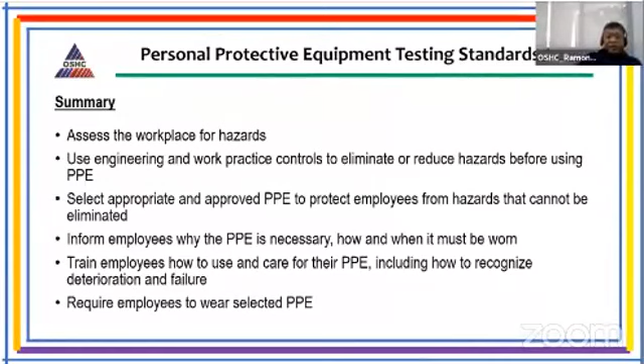Now, if you are wondering what we give to those who request testing, this is what our final test result looks like.

More or less, for all types of PPEs, it's 2 pages. We can see here the brand, the type of PPE, and this first box is the description of the PPE that we tested. This colored box shows the standard we used for the testing.

And these are the results of the test, all of this. These are the results of the test, and our remarks on the test that was done, signed by the person who tested it and approved by the management of the OSHC.

Just a reminder, the validity of test results is based on the ISO procedure for PPE testing and assessment. The final test result report issued for a PPE test request shall have a validity of 2 years from the date indicated in the report.

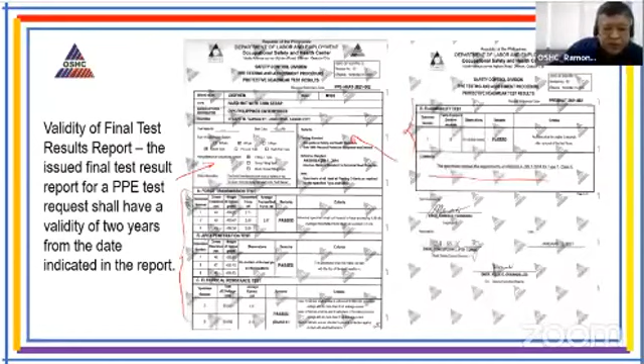It's hanging, sorry. Sir Mon, I'll just share the website, sir.